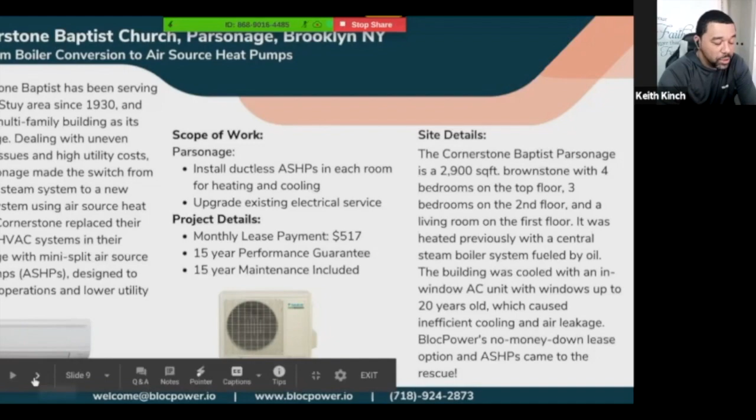So this is a big item project for us, which is very important, and we're proud of it. And maybe similarly, this next one is more similar to some of the buildings in your community.

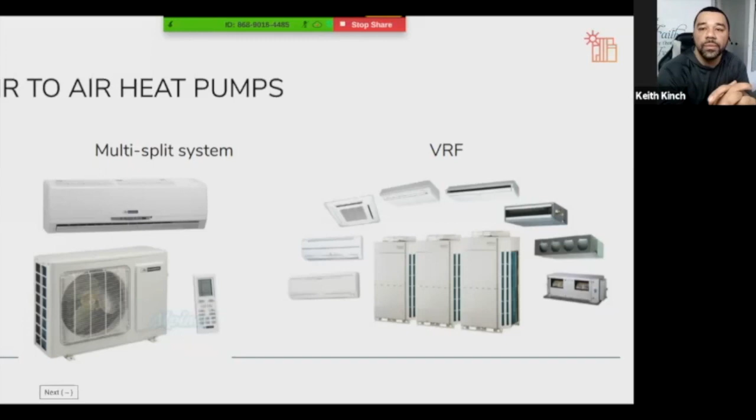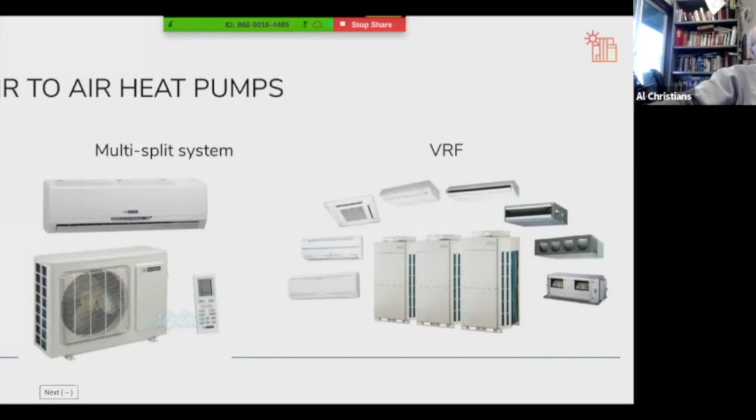Thank you, Keith. There's a question from Al Christians. Yes, the question is about ventilation. You've talked about ventilation — the science says that when carbon dioxide gets high, the atmosphere now is around 400 parts per million, and over 1,000 the human brain starts working not quite so well. It's easy to get 2,000 parts per million indoors in a crowded building. It's known that probably up to 500 is safe, but above that, especially in crowded buildings, it's not good for thinking.

And now with the COVID pandemic, we've got additional requirements for ventilation. I wonder if your service, your guarantees of service, include anything about parts per million of carbon dioxide inside the buildings, as far as what levels you'll maintain. I'm suspicious of this focus on saving money, because I've ridden on enough airplanes where they save money by kind of suffocating their passengers. So I wonder what you're doing in that regard, as far as guaranteeing there's good fresh air in your buildings.

Yeah, that's a great question, and you're right — over the last year we've definitely shifted our conversations around air quality more than saving money. Obviously it depends on the building owner and what he or she has been focused on. We're not going to make any guarantees because that's just not feasible. But to be very honest, the systems do provide the cleanest air possible, and they do maintain the levels you mentioned. You're right that in a crowded room or building, carbon dioxide levels can increase, but we're not doing what airplanes do either. So on a larger scale, the system size is key. When you think about putting in a new system, there are a couple of factors.

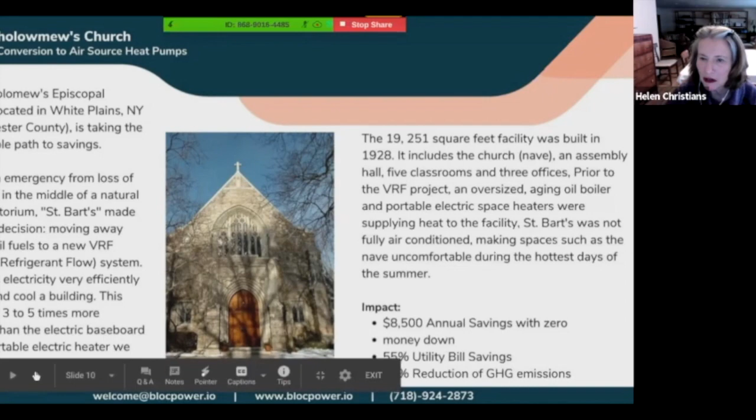Electrification - I'm really confused because I know that our power companies, Pacific Power here and PGE, they get their power from coal mines and also natural gas, and those are greenhouse gas problems for us. So how does your company bypass that? Or what does electrification mean?

That's a two-part question, I'll try to answer them separately. On a building level, if you look at the system you're heating your home with now - if it's oil or natural gas - you as a building owner, homeowner, or business owner are using fossil fuels to heat your building. So our goal is to get your building off fossil fuels first and use electricity to heat and cool the building. That's the first step. If we can do that, it goes a long way with carbon footprint and with sustainable communities across this country. And it also begins to change policies and how governments look at heating, cooling, and energizing their cities.

The church has a steep roof. Does the snow stay on that roof in the winter, or does it fall off?

It's both, but the church also has 4 other buildings. This is the main sanctuary where they have services. They have another building with a flat roof that's used for school, then another building also used for school, and another building for community services.

So if they're going to put solar on the rooftops, it's going to be on the latter ones I mentioned, if it's going to go on the roof. And it could be — that's a great question though.

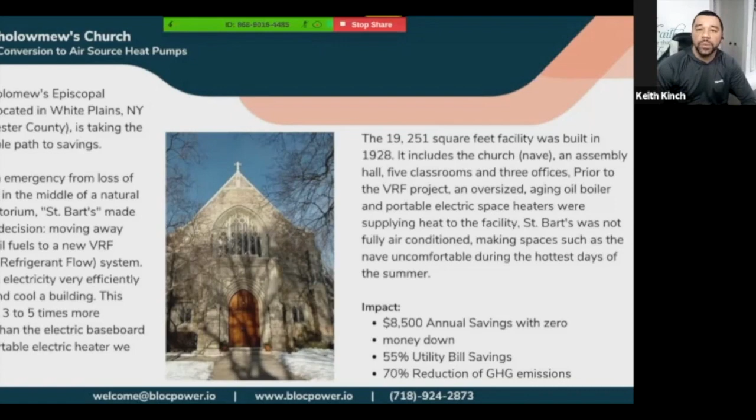This particular project was featured on the Weather Channel maybe about a month or so ago with Dave Malkoff and Donnell, and they talked about the work in the building.

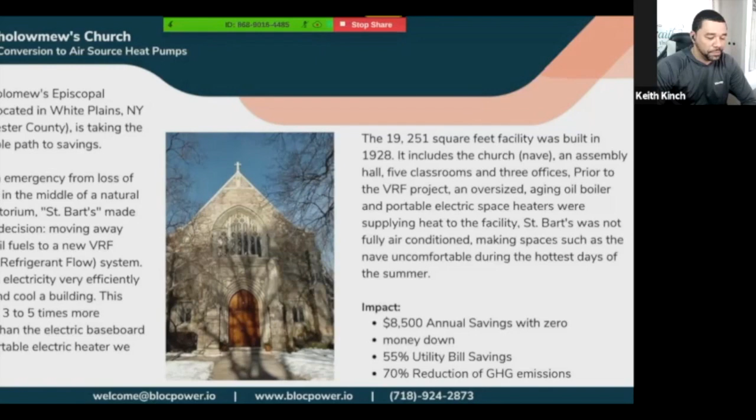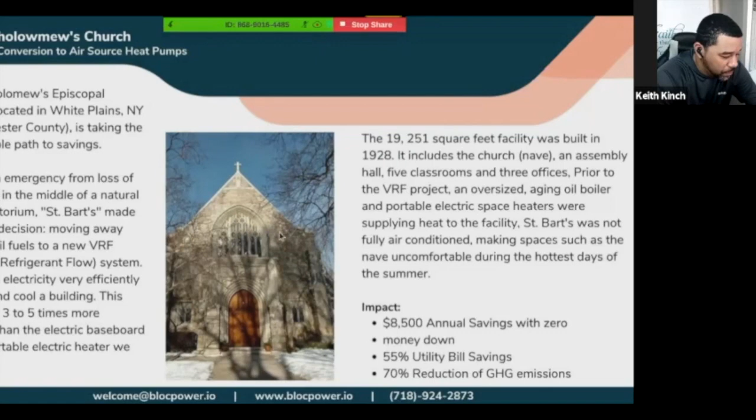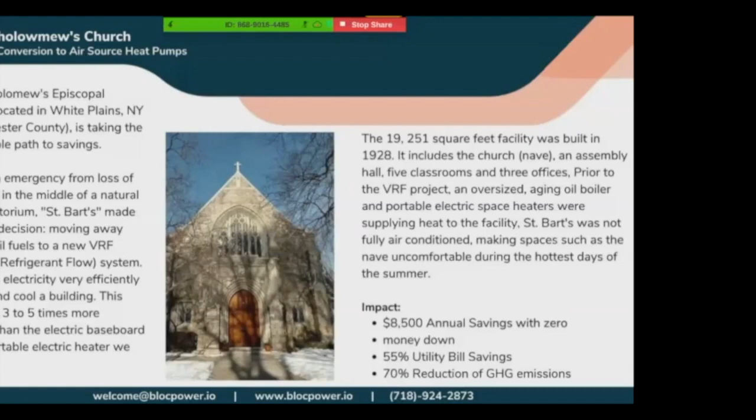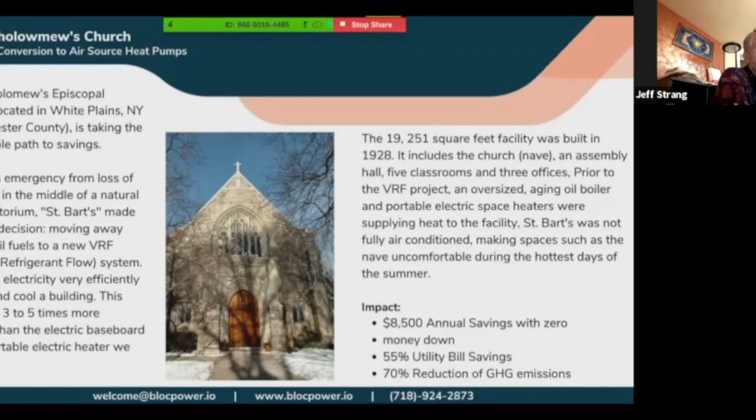I really appreciate what you're doing, Mr. Kinch, and I'm hoping the Portland Clean Energy Fund, which we passed in 2018, will eventually put $50 million into clean energy projects in the city of Portland. Once it gets going full steam next year, I'm hoping we'll be able to do some significant energy upgrades to our buildings here. But the mix is a little different than in Brooklyn—we don't have nearly as many multi-family buildings, we have a lot of single family residences here, so the mix is different.

We focused initially on multifamily homes and houses of worship or small commercial buildings because, according to the science, they were the largest offenders in regards to carbon emissions. So we focused on those first, and also on the incentives and where the city was leaning.

As we did this work, we found ourselves asking, okay, what's there for single family homes? As you know, they can vary from 1 to 2 units up to a larger 5-unit home. So we spent time working with NYSERDA, a great partner, and Con Edison to figure out what incentives are available and the next steps. Now we're working toward retrofitting hopefully 1,000 single family homes in the next 2 years.

It sounds like a large number, but in 2017 we did 200 solar homes in about 15 months — 200 homes installed solar panels, using the same community-driven approach. We worked on the ground, had 3 very early adopters willing to put panels on their home and be the face of the work, and we were able to replicate it.

To your question and the last question, if there's an appetite to do single family homes, then as we look at the Portland Clean Energy Fund as it gets vested, there should be talk about how we're going to incentivize the largest swath of homes based on building typology. So if it's all single family homes, it's like, okay, what are we doing to make sure as many single family homes as possible are completing projects, and what incentives do they need?

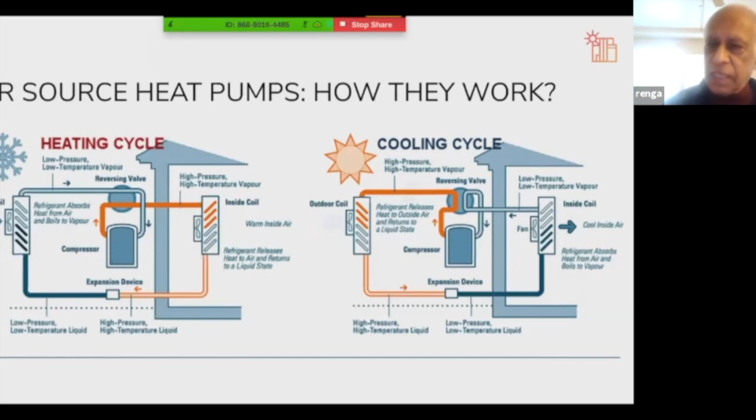So there's a need to go into this problem, do the research, and plan for this, especially now that we are talking about large scale investments in infrastructure. This is the time to worry about what happens after 20, 30 years when this situation arises. How do we face these problems? So we need to start right now, and a lot of research needs to be done on many of the other possibilities.

Well, first, I agree, and I feel like you should be on the forefront of this as well, because it's a question that... I mean, I've had a lot of these conversations over the last 3-4 years, and your questions and comments and concerns are right up against what we hear from other homeowners, other key stakeholders in the community, and even governments and utilities.

I don't think it's one answer. I do agree that we do need a mix of answers to deal with that day when we have a more mixed power grid, or if we're on clean energy. And we're still learning about it.

What I would say is that I look forward to that day where if we're at a point where clean energy is, to your point sir, 50, 60, 70% of the grid, 85%, 95%, and then if you and I need to have like a knockdown argument on how to fix it, I would love it, because it means that we both won. It means that we're off fossil fuels, and maybe we've staved off some climate change.

And we can focus on the next step of, to your point, building the best backup systems, including hydrogen, which is something that folks talk about. I know there's other things, I know wind has been talked about as some form of backup as well. But you're right.

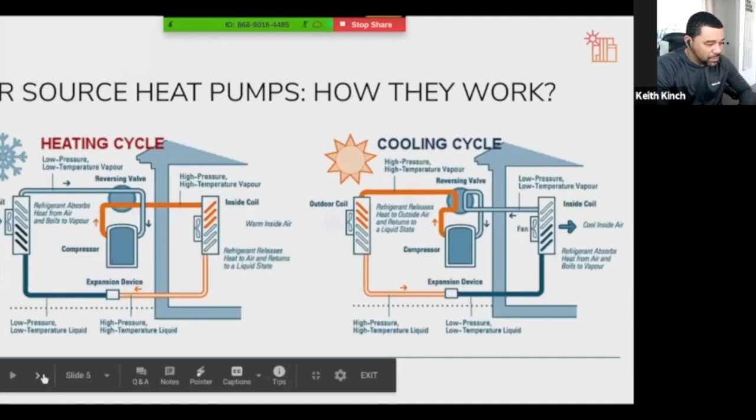First, let me say thank you for the opportunity to do this today. I really enjoy this. I know that sounds like I'm placating or trying to be nice, but I mean it. I enjoy having these conversations, because it means I'm not the only person thinking about this 7 days a week - and not just energy, but community organizing and bettering the earth and everything we're doing. So I always appreciate that.

Second, it seems everyone's aligned here around at least three items. One, how do we move forward. And then once we get there, how we go to the next level. It seems at minimum you have the Portland Clean Energy Fund, and you have some plan in place, whether it's the best plan or not. I think that's great, and I would love to work with you, or anyone else you feel I need to talk to in Portland to help with the process.

Finally, I've said a lot of nice things today - I think I have to review the tape later, maybe I wasn't so good. But if you know any building owners, anyone else, just go through the process. Fill out a building intake form, let us know what you think. We're always interested to hear how building owners across the country think about our building intake form. What works in Florida may not work here, or other places. So we're always excited to learn about that and what other needs there are.